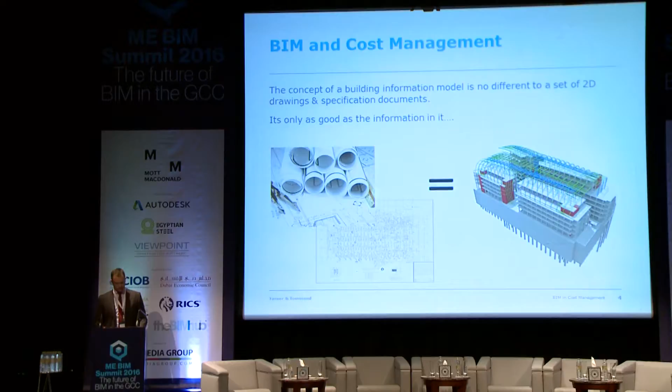What does good look like? What does a good BIM model with good data look like? Some of the cost managers here today might have only worked in a 2D workflow and done measurement of drawings, but what does a good BIM model look like in the future? They will have to understand that bit more and more.

Essentially, the tools have changed and the outputs have changed. We no longer measure with rulers on paper, and over time these 2D CAD measurement tools came along, which greatly improved the efficiency and speed that we could take off and measure. But ultimately, we're now working in a 3D environment with 3D objects, and that requires different tools and different processes.

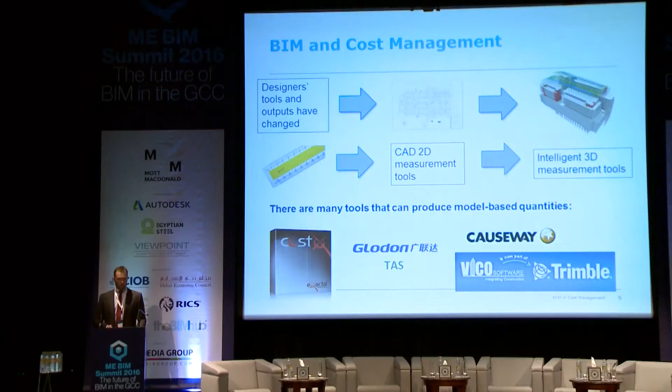Now, there are many tools out there - CostX, Glodon, Causeway, Vico, many out there. I'm not here to tell you which ones are best. It's really up to yourselves to test these products against each other and see which ones fit into your workflows more effectively. So again, it's all about technology and the process.

It's not just about the 3D models. You can quite easily get the measurement from a door based on its 3D geometry. But what if that door is actually classified as an internal door when it's actually an external door? What if the fire rating is wrong? When you start scheduling and grouping your objects and trying to populate a cost plan, they will be wrong. So it's very important that your designers understand that these models will be used for costing and what requirements there are from a cost management perspective.

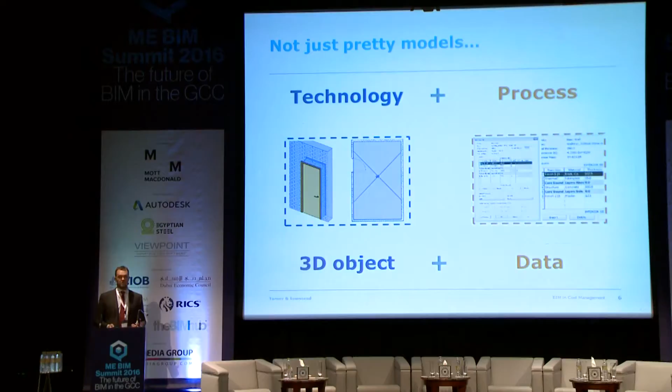Contractual arrangements. You can't just expect someone to carry out a BIM use if it's not in their contract. Very often we deal with designers who are being asked to work in a BIM environment, but because clear definition isn't there and it's not in their scope of services, it's very easy for them to turn around and say we're struggling with this. We've never worked on a BIM project where you've quantified our models and produced a cost plan from it, so sorry, we're not doing it anymore. There needs to be a robust contractual arrangement in place.

Common data environment. I'm sure today there was a lot spoken about the common data environment. It's very important for cost managers to be part of that process, including the electronic document management system where we have all our models and file specifications. Version control, good information management, and good protocols are absolutely key for cost managers to understand what is the latest information, what am I comparing it against, and how has it evolved over time.

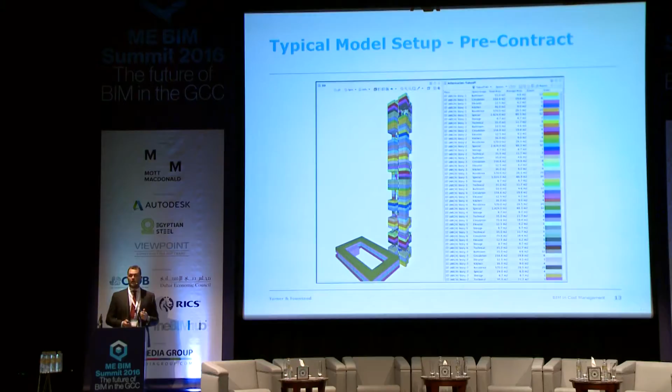So on a high-rise, for instance, very early on at LOD 100, in terms of massing, you can specify in the brief the circulation areas, bedrooms - in this case a high-rise hotel - kitchens, storage cupboards, and very quickly extract those volumes and areas and apply rates to populate a cost plan.

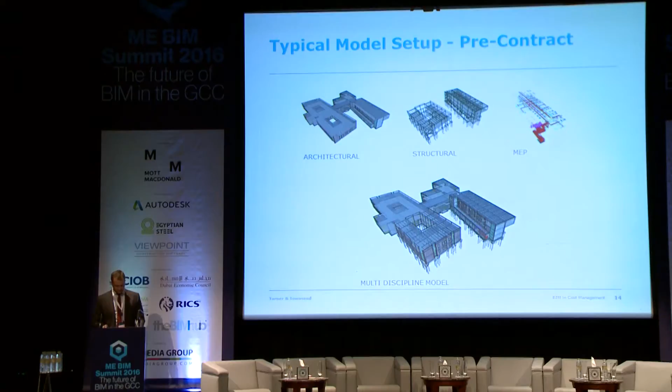Moving on, when you get to LOD 200 and above, you can start doing elemental cost plans. Cost managers are able to extract quantities directly from the model and associate them with items in a cost plan. In terms of the attributes, I talked earlier about the importance of checking models and how important it is to check the data.

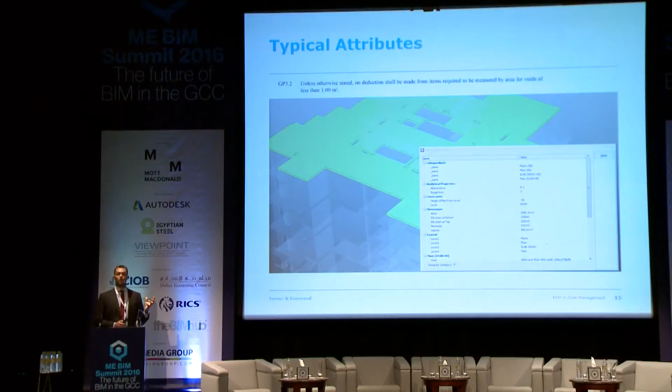For instance, within this measurement standard, it says that no deduction shall be made from items required to be measured by area for voids of less than 1 meter squared. So if that was automatically extracted, the software doesn't know what these rules are. Cost managers play a vital part in understanding what quantities have been extracted from the model - they must be checked to see if they're actually in line with these measurement standards.

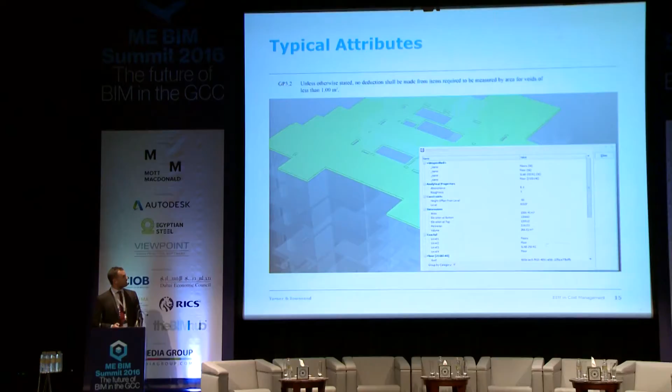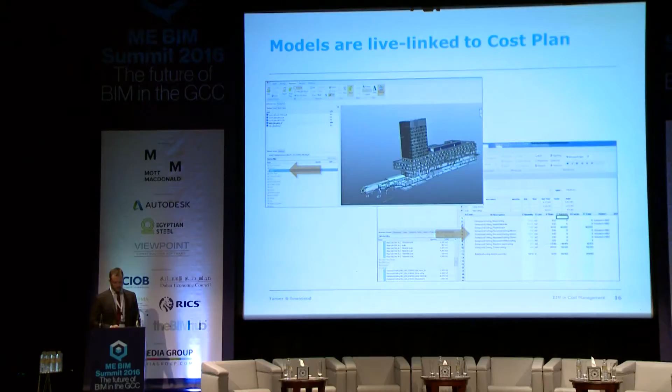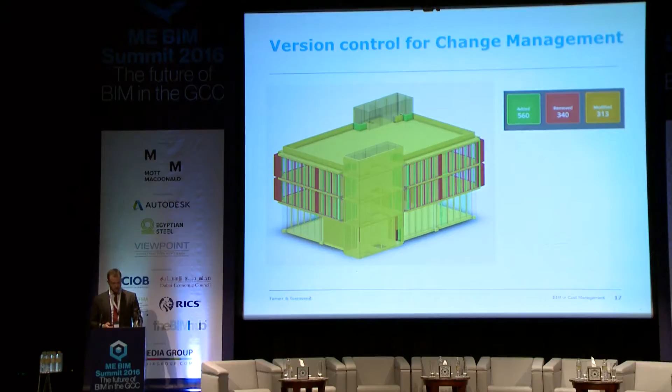Working in a common data environment, designers must use good versioning and good information management all around. The software tools now allow you to compare one model with the next. So as one revision of a model changes, whether it's a week, two weeks, or a month, you can very quickly see which elements have been added, removed, or modified. Visually, we can now see how the design has changed and how that has influenced the cost and budget of the project.

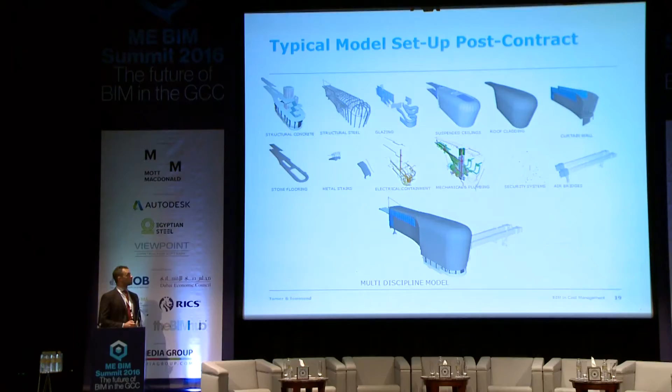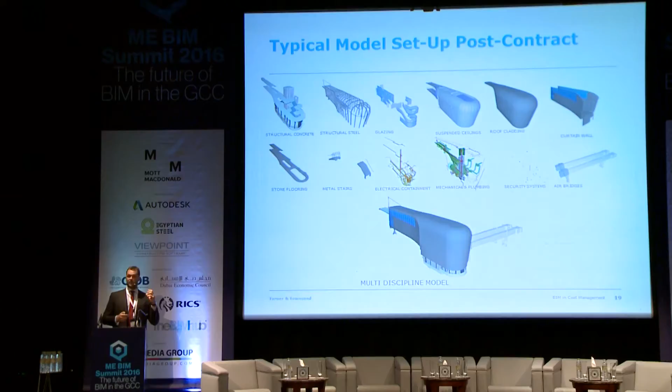Going post-contract, it can be argued that contractors have a slightly more difficult time dealing with many different models segregated into packages. It's really important here that when models get segregated, you can't just have one massive model which your other cost managers can't use. Typically, they might only be able to open a file of 200 to 500 megabytes, so these packages must be split down and segregated so that everyone can use them - it's not just about designers being able to handle big models.

Going further, at LOD 400 - fabricating models - this allows us to check variances in the design, comparing subcontractor models against the bill of quantities to see where those cost variances have come in. Throughout construction, valuations can also be made based on the packages as they are completed and verified on site, so that payment verifications can be made.

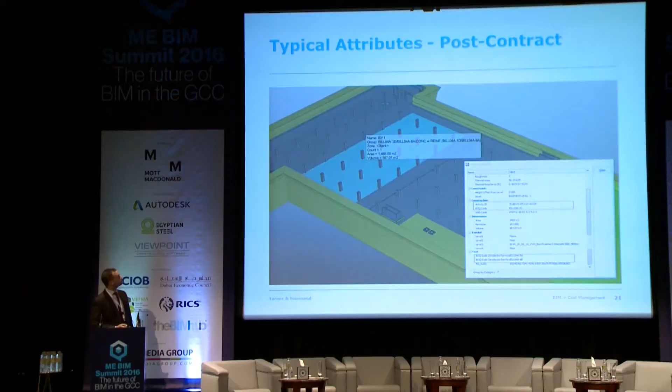So just in terms of our lessons learned, again, I might have covered some of these already. Level of detail and data in the model is very, very important. Cost managers must understand what is in there, what should be in there, and in what format.

Lack of consideration by the designers of how others are going to rely on the BIM model. Again, if you stipulate it in your BIM requirements at the very start and your designers are aware of the requirements, then this shouldn't really be a problem.

Interoperability and hardware capability. I briefly mentioned the fact that some cost consultants aren't actually able to open large models. We also know about a lack of interoperability between file exchange formats. Not all softwares can actually open other types of software. Your cost managers must stipulate what format they need to receive to produce their own outputs.

And then not following measurement standards, covered that. Misalignment of naming conventions, again, bad modeling is just not acceptable, and hopefully over time, as the industry matures, we will see a higher level of quality models coming through that our designers and cost managers can use. A very trivial issue, like not setting the decimal places correctly and actually getting volumes in millimeter cube, for instance, can cause havoc. A very small point, but very important as well.

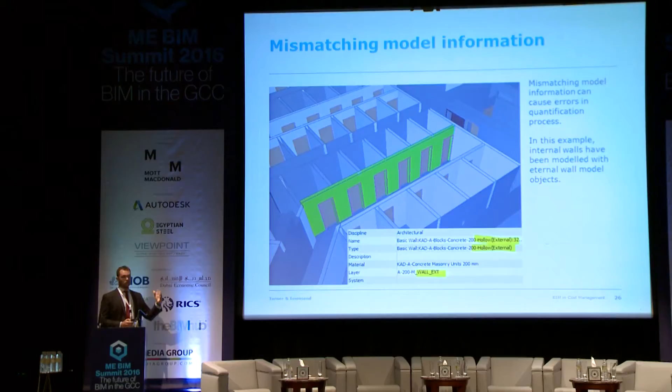Here you have an internal wall which is actually classified as an external wall. So you might have a partition wall inside, but that wrong data there, if you schedule that off, is actually going to give you the wrong amounts for your external walls. So again, something to be very mindful of. Cost managers must almost interrogate these models and make sure that the information inside them is correct.

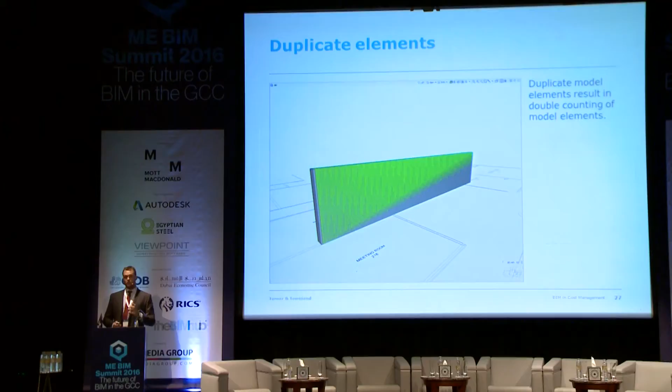Still don't know how this happens, but we see this a lot. Duplicate items. Sometimes you see duplicate walls, almost 2-3 walls inside each other, columns over and over. That's going to double, triple the quantities that you extract from that model. It's impossible to see if you don't actually check it because they're exactly on top of each other. So if you were to just walk through a model, it's very hard to spot duplicates. You almost need a software that can actually do the model checking for you.

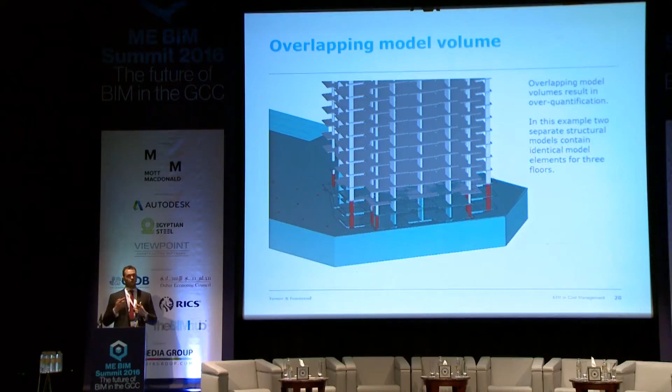Again, overlapping volumes will result in over-quantification. So here you have separate structural models containing exactly the same elements in 3 floors. Again, if you look at one model and then you look at the other model, you might not realize that. And actually, your quantities coming out of that will be completely wrong because when you put them together, they're actually overlapping.

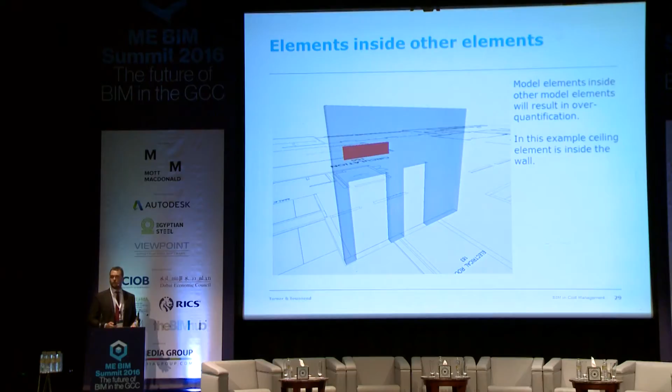Rogue items. Again, this is just perhaps designers not checking their own models and making sure that they're good. There's just a random piece of ceiling inside a wall. Again, we spot these all the time, just rogue items, which aren't actually removed from the model and can give you the wrong quantities.

Again, structural columns just moving all the way up through all the floors and actually not stopping at the base and the top face of a slab, actually going straight through all the way. It's going to produce the wrong quantities in terms of your concrete. So very important. This is something we see all the time because it's actually very quick for designers to evolve the design using this method.

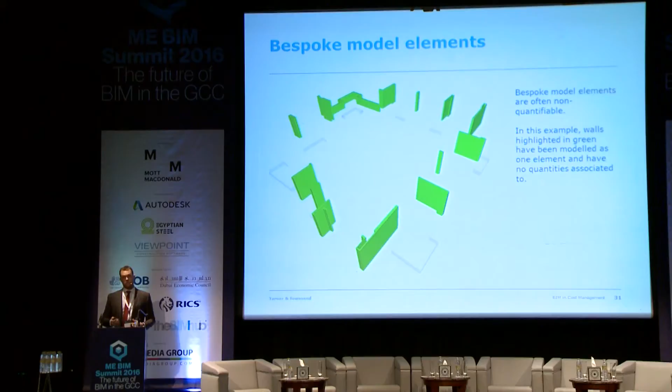Some objects are just grouped together because, again, this eases the efficiency within design. But if you were to measure that, it would actually just give you the area of one object as opposed to separate objects. Again, designers must understand that they need to be separated. They must be separate items for you as a cost manager to actually extract those quantities correctly.

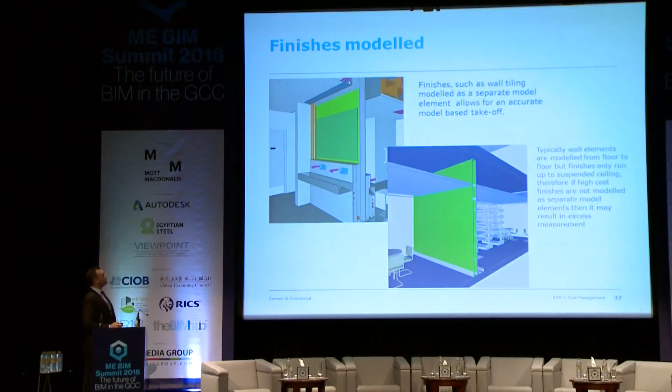Top left, that is finishes such as wall tiling. Wall tiling must be modeled as separate elements. This doesn't happen all the time.

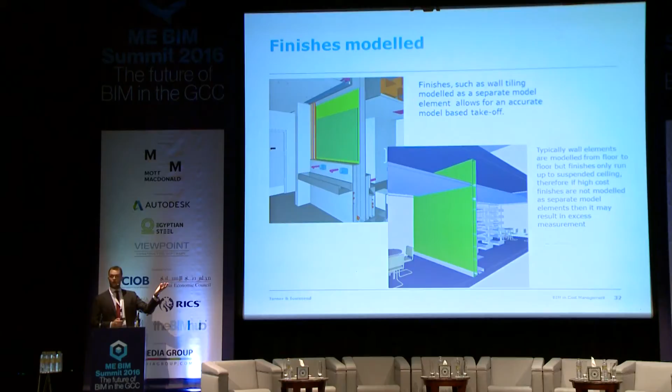Again, I would actually advise modeling finishes. It's not always necessary. For the top or bottom right, if you were to schedule finishes off from the wall areas, it would actually calculate the whole wall, when in reality we don't complete our finishes all the way to the slab, but maybe just above the ceiling. So all that extra area you've quantified from your model is actually wrong. It will be less than that.

And again, I mentioned landscaping. It's not just landscaping, signage. We work with irrigation designers who are currently not working in a BIM environment. They produce 2D quantification, 2D drawings. So there is still a manual output and a manual measurement that needs to happen.

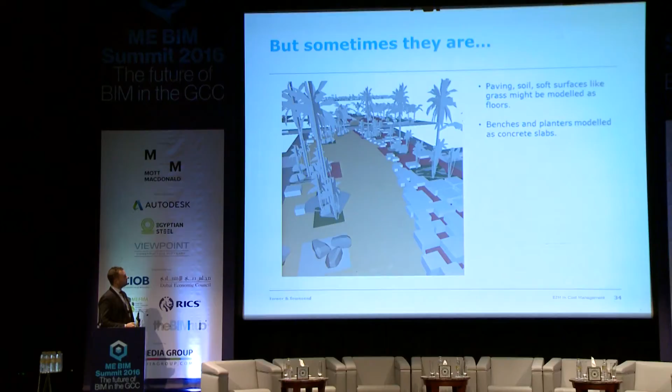However, sometimes landscape designers do design using 3D authoring tools. However, I'd say they're not that well suited yet. Paving, soil, soft surfaces, and grass in Revit in particular can't handle that very well, so they're actually modeled as floors. Benches, planters, and other things are actually modeled as concrete slabs.

So you can see that if a designer didn't interrogate the model and just quickly extracted the quantities and added it to concrete, it would actually give him the wrong quantities altogether.

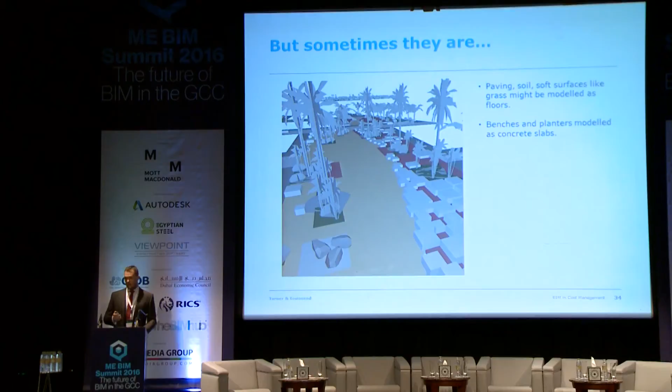And just to finish off, I think cost managers will become an even more valuable project team member because they require a very deep understanding of all the building elements in these models. They can actually validate the correctness and completeness of the data in the models, working very closely throughout the design and not just producing a cost plan at the end of each stage.

They'll be able to report more accurate estimates faster using BIM so that they can spend more time making better informed commercial decisions. After all, they are maintaining a living cost plan. And like Alan said, we are designing to cost, or we should design to cost. We shouldn't be costing a design. Ultimately, this can avoid the need for value engineering.

And that's it. Thank you very much.

Just a final chance, the last session of the day, to ask some questions. I must admit, all of the lessons learned that you were talking about up there, I've personally come across every single one of those. So these certainly aren't isolated occurrences.

And I suppose from my point of view, I guess what we're saying is the cost manager actually has to be there earlier. It's not unusual for cost management to happen earlier, but it feels like the cost manager's got to be integrated into the design team earlier. Would you say that's the case?